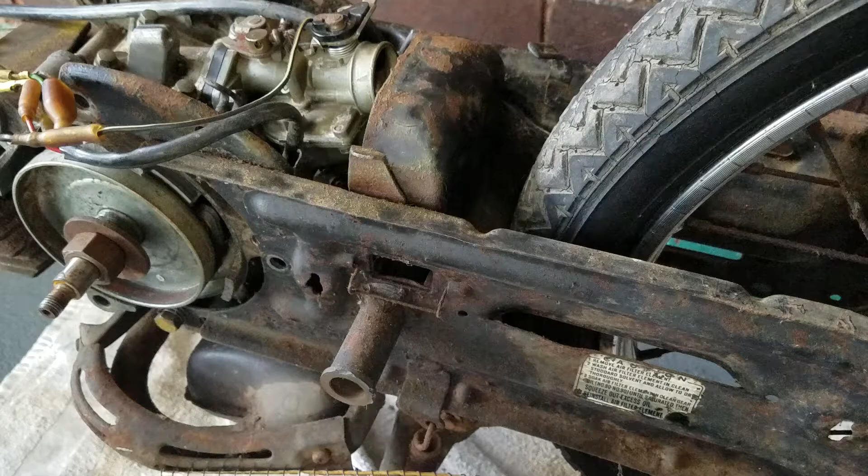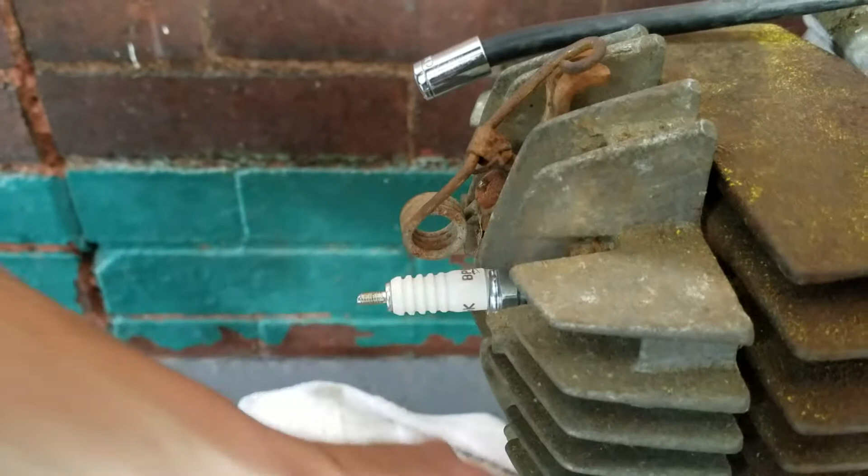The spark plug is a BP6HS, a regular NGK. It's the only one you use, regular NGK, that's the number on it, so they're really plentiful for that. And that goes down.

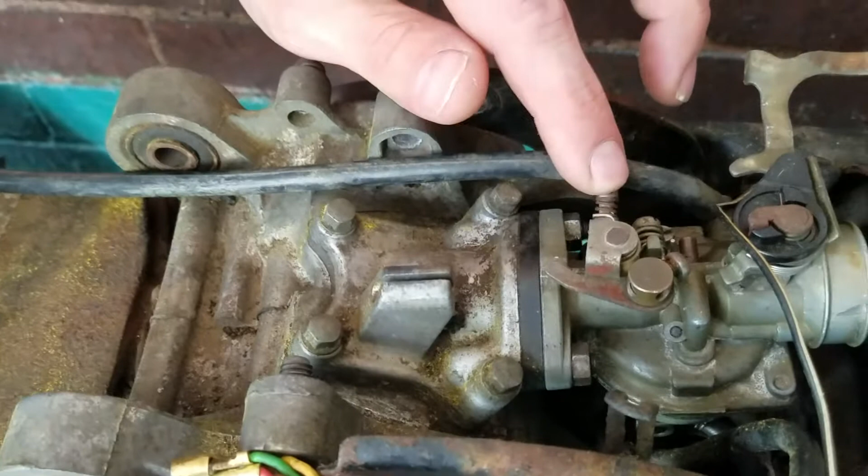This screw is your idle air mixture screw. We never pulled it out, we try not to so we don't mess it up, but if you count the turns in and out, that'll tell you. Just remember to count the turns, but we leave ours in when we clean it.

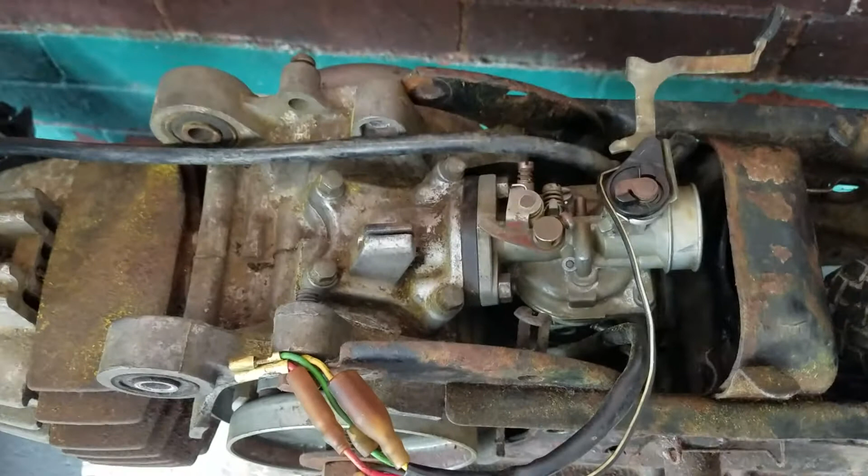This screw has to come out to get cleaned, and this one too, so that's why I marked it here. This screw and this screw only, and we just boiled them in Dawn dish soap because Dawn dish soap works the best. Also vinegar, if you have vinegar that works too, because we're trying to get the emulsifier tube out.

That's where the jet is, after you pull the float and the float pin out, which is not adjustable, so be very, very careful, because ours was stuck in there. We're just going to work out the emulsifier tube, you put a coat hanger through that's bent like a hook, like my finger, and you push it out. Ours has been stuck in there for a long time, but it stayed running and stuff.

So this is choke open, half choke closed.

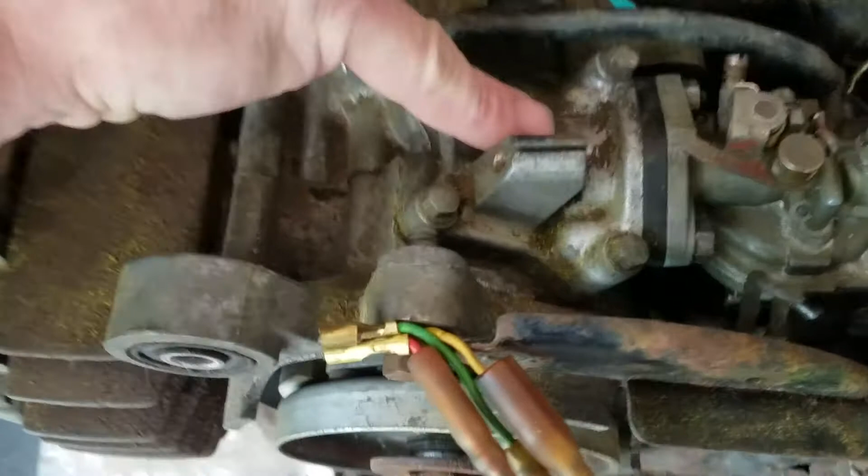Like we said, we need a stage 1 racing reed valve, just a regular one, not the one for big bore, just a regular one will be fine. And we need the racing pipe, the black one, the turbo one will be fine if anybody's got one.

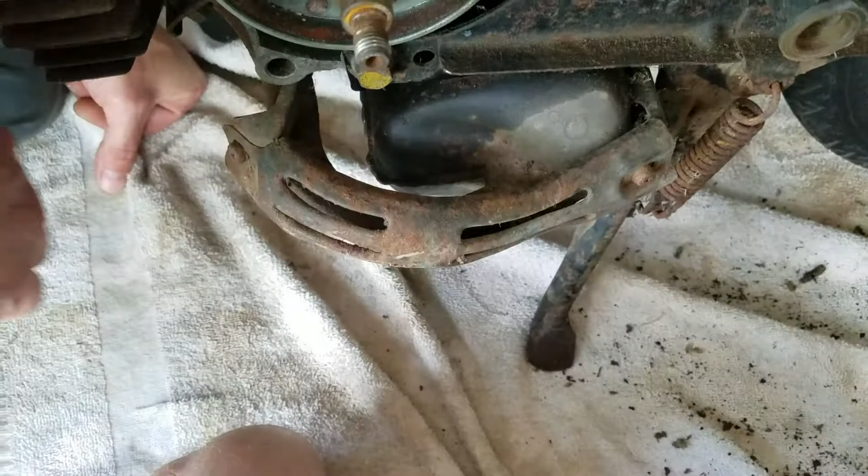Here are your magneto wires. Red, you can flip the plastic back, be careful. Green and yellow are grounded out. Black is going to go back here to the coil, just back here. And there's a condenser right here if you can see it, you can sneak in there. The condenser you can use one from a 6-volt Volkswagen Beetle from a long time ago if you need a new one.

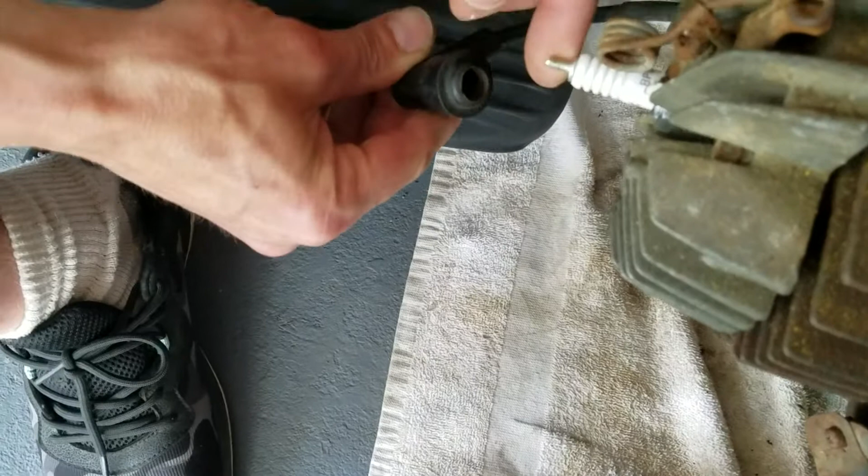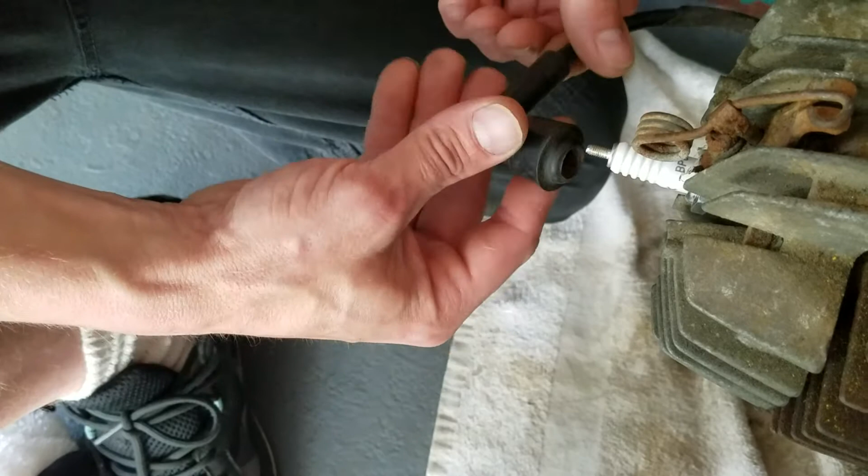Here's your coil wire, or spark plug wire, coming all the way down. It doesn't use the top, you unthread that, and this does unthread off of here too. So you can unthread this, everybody keeps asking about it. It's just like an old school one, so you can unthread it off of there, take this, pop this back on there. We don't run the decompression valve, watch out, they like to stick, so we just leave it closed because obviously we can start it without it.

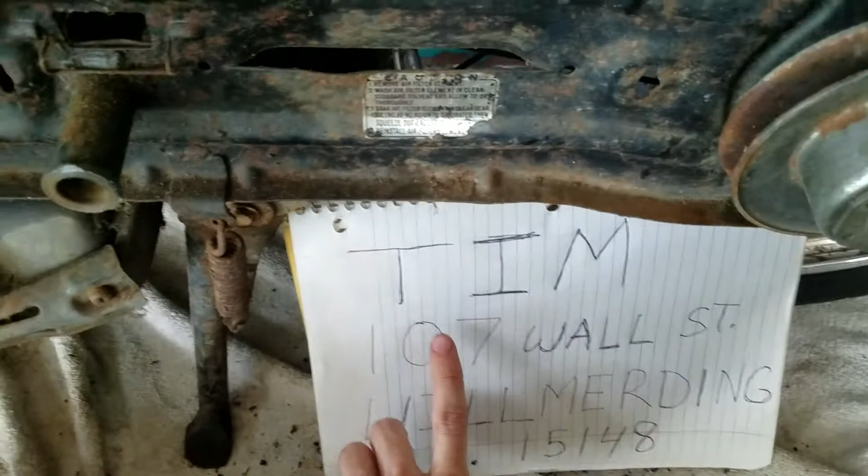Right here, you can put a toggle switch in between, we intermediate, you can put a toggle switch right here and you could actually run the bike around. But for the lights and everything else, you do need the silicon rectifier. It's actually silicon, there's no E in there. It's a little black rubber box, mounts about here, and it cuts all the oscillating waves in half from the generator, so that way you only run a 6-volt light bulb. That'll be in another video of how to redo it and stuff.

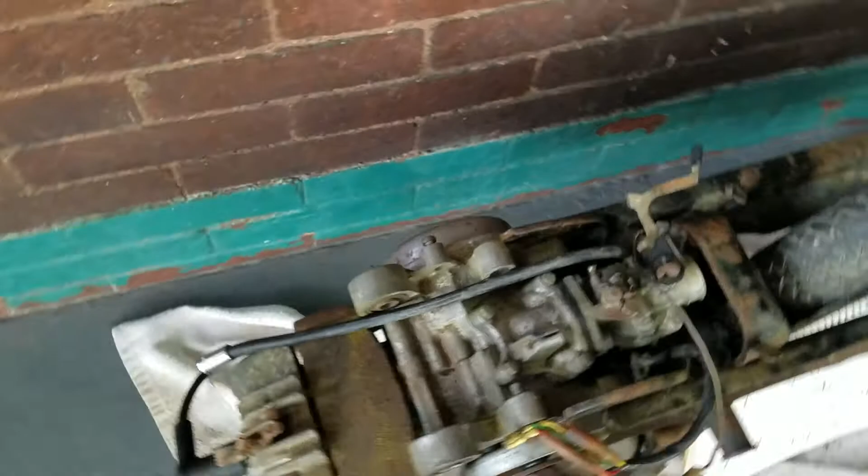But this is the moped. This is a Honda Hobbit, 1980s PA moped, and you can see we need a tire, but everything else is pretty good.

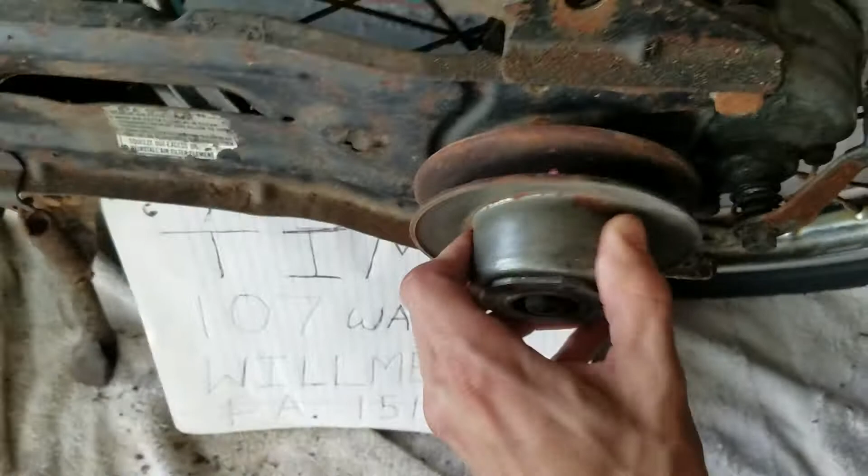As you can see, look at this. It moves, this wiggles.

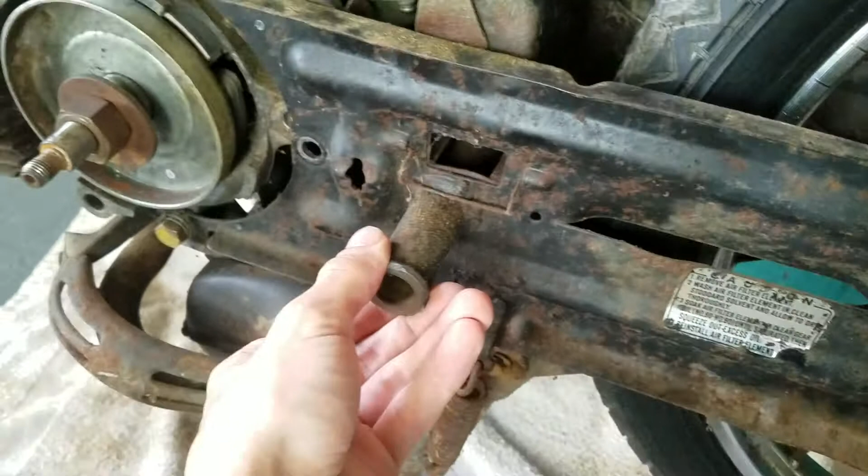We just got to get it all cleaned up, and we need to get a new peg here for your feet because we don't have that. We're gonna put them in because we don't pedal start anymore. We're not pedal starting, we're gonna push start, kick start, or pull start. We're gonna probably set up like a motorcycle and kick start this thing.

The one-way bearing for push starting is great. If you ever want to move it around, just hit your switch back there. We'd like to have that, and we could just push start it until we get a kick start.

We started with the drill, but we're gonna make this into a cafe racer. That's gonna be our goal.

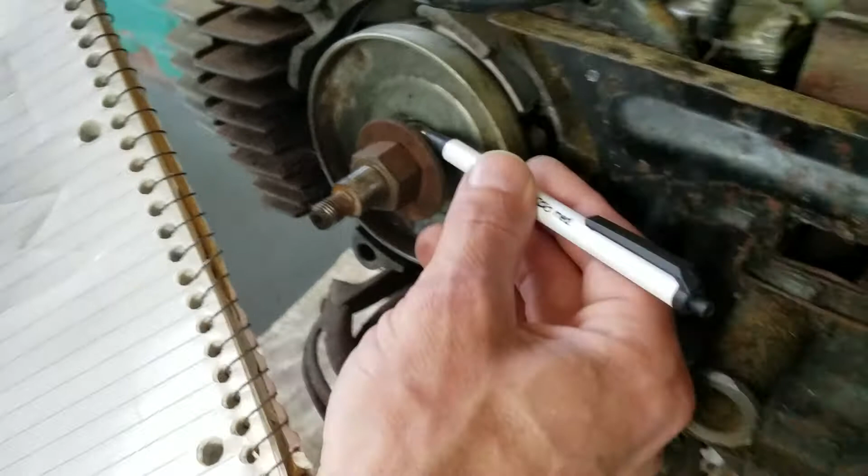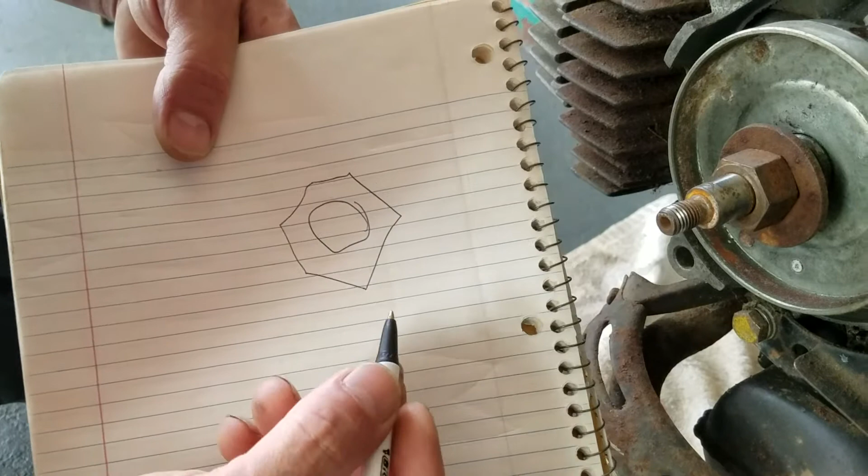I want to explain right here the threads. It's just a nut, like this. Let me do a crude drawing. It's a CV nut off a car, 24 by 1.5, like a 2000 Honda Accord. You get it at the auto parts store, and it's just a nut like this.

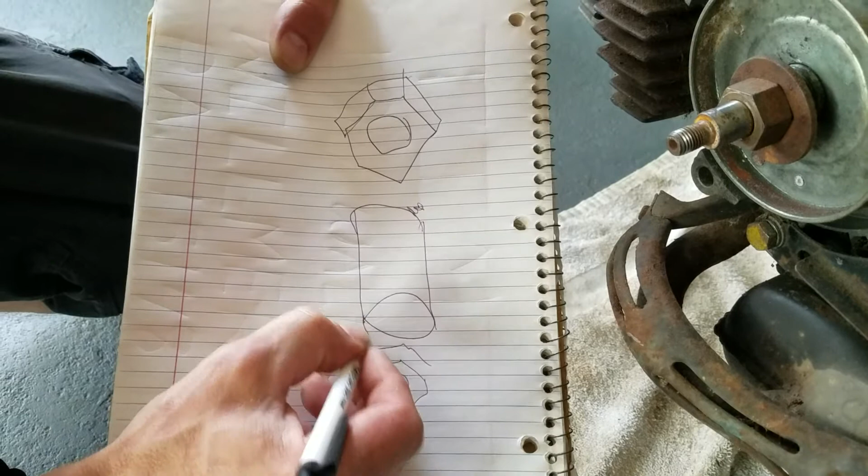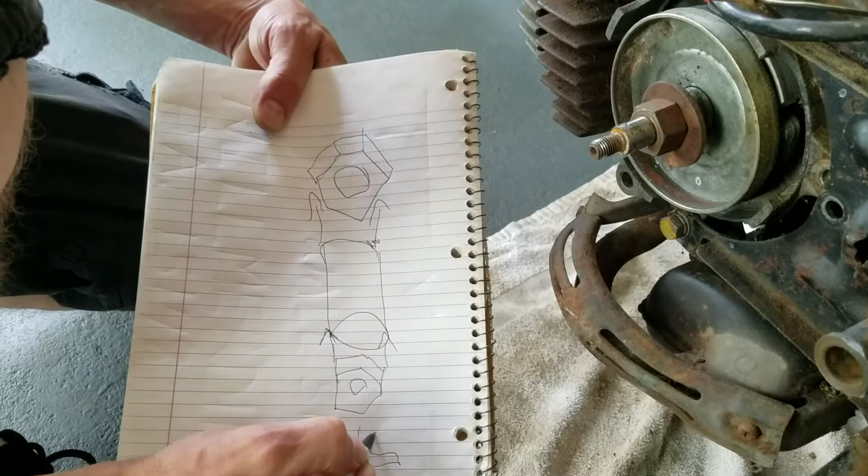Then you take a piece of tubing like this, weld these two together, and then you take a smaller nut, any nut like this, and you weld it onto here, to here, see here. So you got two welds, a nut, and then of course a bolt. That's how you make a puller to pull it off. Make a homemade one so you don't have to order one.

And like I said, be careful of your magneto on the inside. Don't stick any screwdrivers in there.

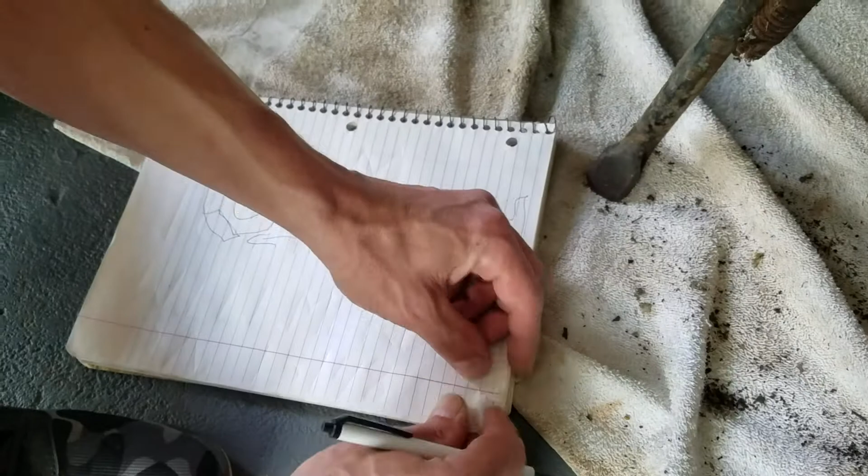Just fold your sandpaper in half like this. Watch, I'll just tear off a little piece. Oh, I got a piece right here. That would be the tool we're going to be making so we can go in there. You fold it in half like this, open your points, stick it in there and let it pinch it, and just pull it out. All you gotta do is clean a couple of times so you don't increase your points gap.

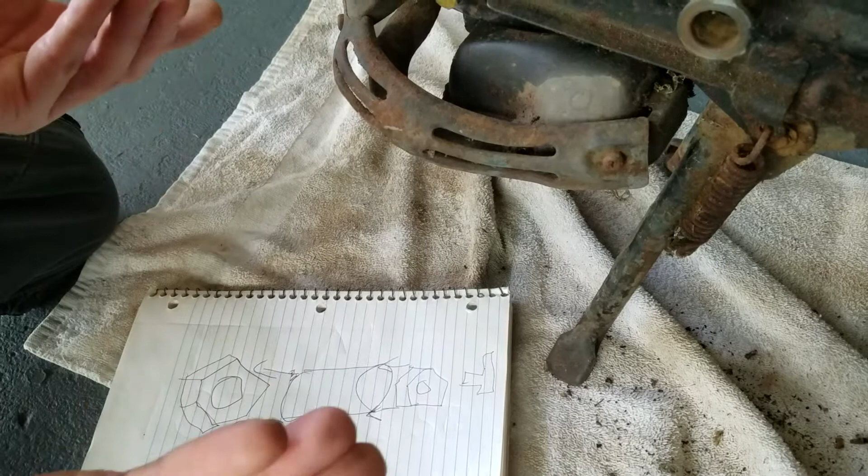Because our bike only has 1,137 miles on it, we just cleaned off the points to make contact, and it was fine. We never even pulled the flywheel off to clean in there, which is fine. It just keeps on running and running and running.

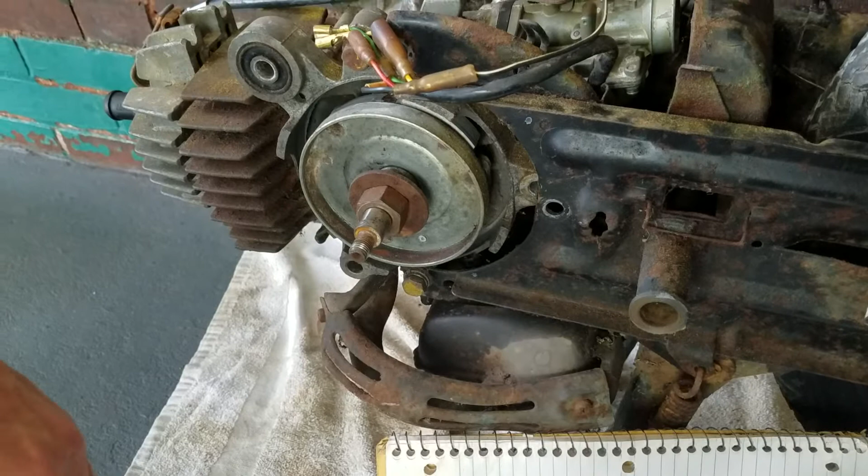We're just trying to get stuff going, and we want to collect as much parts as we can. No, we're not collecting them to sell them, we're collecting them to rebuild. Keep them and rebuild, and we try to save all the Hondas we can find. They're just really hard to find where we live, so every time one turns up, we try to go and get the bike. But like we said, we're on such a strict budget.

The rest of the bike's downstairs, we're cleaning it and stuff. We're just setting up tests to help you, so you can do the same as us, so it ain't confusing, so you can start it up just like we do, and be careful and stuff. Don't stick your hands in moving parts and gasoline.

Just stuff like that. And like I said, I made my mark here. I held a screwdriver, actually I used a chisel, and I just tapped it, so that way when I undid the throttle screw where it idles, I could put it back to where it was. This screw has to come out to take this screw out for cleaning, but we leave this one in when we clean it. Just keep cleaning, and I unbolted it here, and was careful with the gaskets, and of course careful with the float bowl gasket, and stuff like that.

I mean, it's really simple once you go into it. There's nothing to fear.